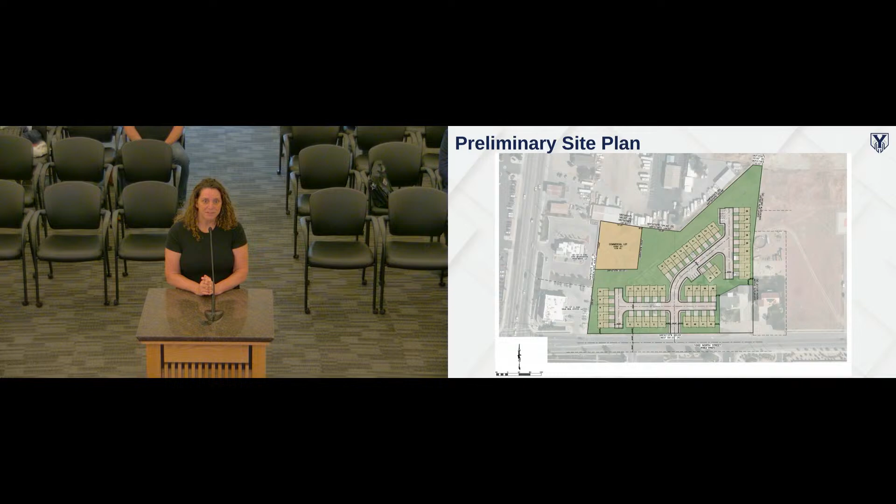Okay, so obviously you're familiar with the location, we don't really need to dive into that so much. If you want to jump to the next part - this site plan is not set in stone. We have not gone through all the nitty-gritty of everything involved because we're waiting and working on this item first. So what we found is, for example, Mr. Perez said it would be really helpful if we understood what these units actually use.

So we took it upon ourselves and went through two different cities and how they were doing it. The first one is the marketplace in Bluffdale. These are all different cities that have this type of product, but the marketplace is very similar to what we are going to be building. If you want to go to the next stage.

Each unit is individually metered inside, and because you have one address on one side, the commercial address is on one side, and the residential address is on the other side. There's two different streets, so if there's a Utah Street and Nevada Street, the residential would be named the same unit number but Nevada, and the commercial street would be named the same number but Utah Street, as an example.

So they're individually metered, and what we were able to do is go into the Bluffdale City water usage data and took all of it. The city has all of that data, and I believe we collected it as well. We showed all the different data and compiled it inside, and none of these units are vacant for commercial or residential use.

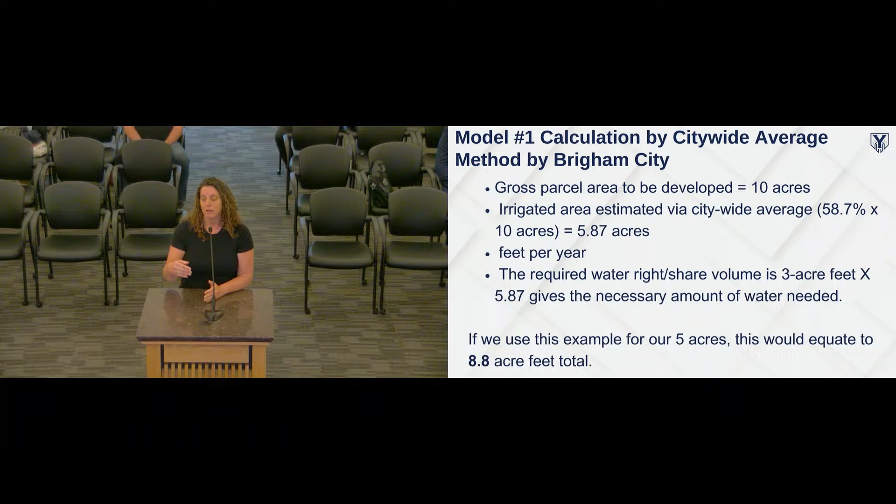They don't go off of the uses or your landscape plan necessarily. Now their code guides the landscape plan, saying, hey, we want drought tolerant plants or things like that inside their code, and we're happy to comply with those things.

So for this particular case, if we use Brigham City's calculation, our piece of land at 5 acres would equate to 8.8 acre feet total that we would need to purchase of water rights. You want to go to the next one for me?

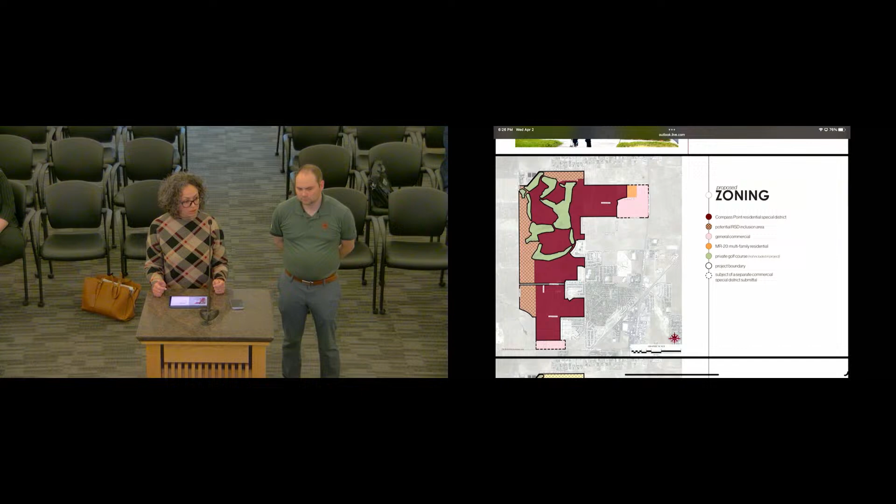It is our intent to stay around 2 to 2.5 units per acre as it relates to the entire community. The land use category there is medium density, and I believe the 2 to 2.5 units comply within that range.

As it relates to the concept plan, while we have overall areas, there's already existing development and natural barriers that provide a better outline of what you can envision for the community to come, as far as development areas and pods, which we will probably move forward terming as villages as we continue with preliminary plat and further design.

The other thing we're trying to take into consideration is appropriate transition of uses. Knowing the overall average is 2.5, we're going to keep a majority of the density closer to the commercial area or closer to the larger arterial roads present within the community.

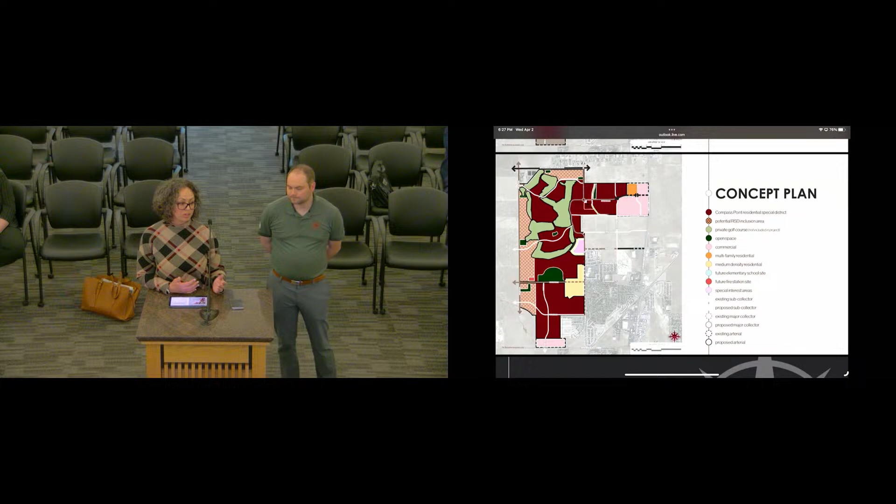As mentioned before, we want this to be a community someone can move into at the very beginning of their stages of home ownership, all the way out as they continue to transition through life. So we've got some smaller home products, including front and rear-loaded townhomes.

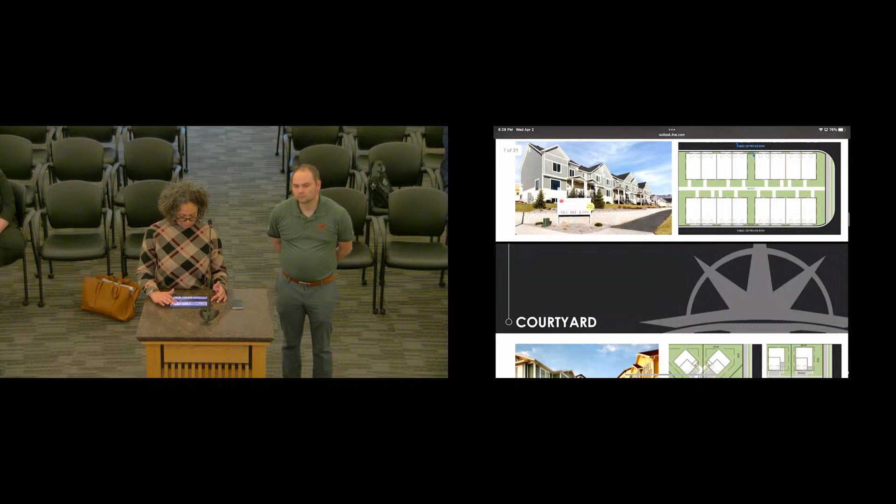We also have a cluster home product, smaller garden front loads, garden rear load, and traditional homes, which we currently have available in our existing communities. We're developing our cottage type, which is a slightly larger home, and then our collection and estate, which are our largest. The estate, for example, are the homes we are currently building within our temple lots, surrounding the temple at this moment.

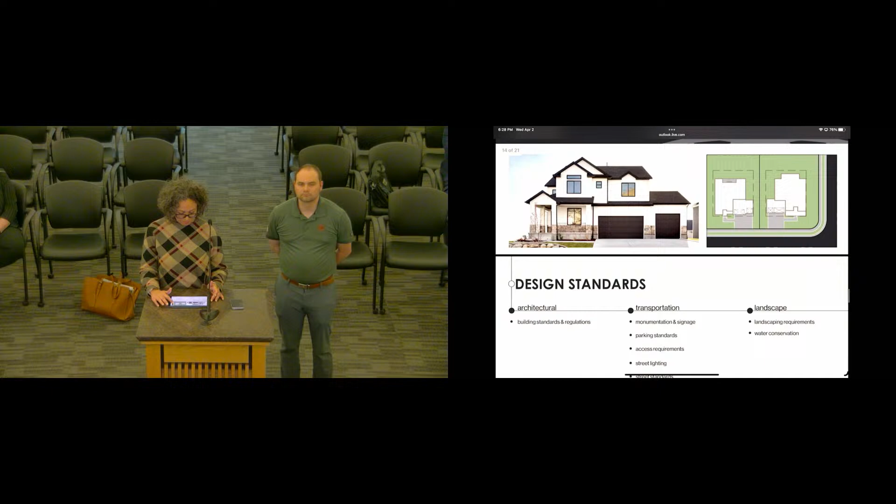Our RSD includes design standards that will allow for flexibility across all of these product types, including standards and regulations. It also covers monumentation and signage, parking, access, street lighting, and street standards we've been working on with the Special Service District. It is our intent to annex this development into the North Tooele Special Service District, along with landscaping requirements and making sure we're meeting all water conservation requirements moving forward.

The open space included within the community is 50 acres total, with a minimum of 47 acres of parks and detention, and a minimum of 3 acres of preserved open space, as shown in green on our open space plan.

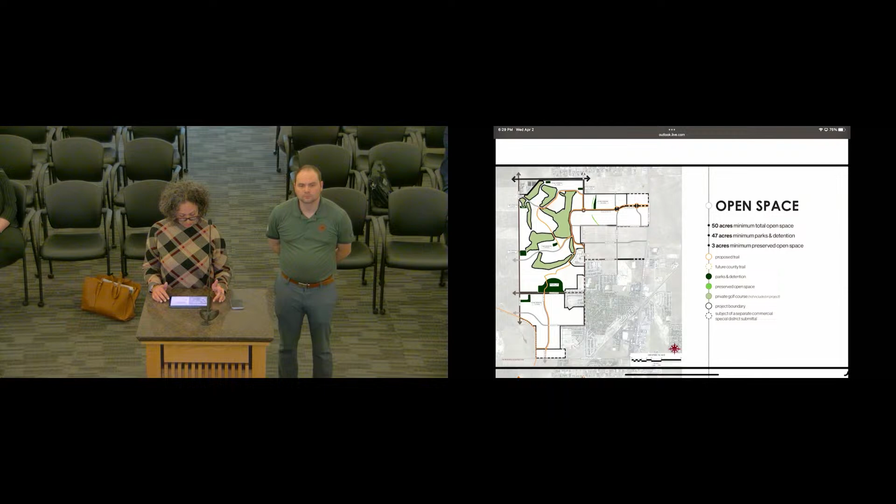As it relates to master planning, we understand we'll have to go through traffic impact studies and work with our water modeling on the finer location of all these items. But we think we've done a pretty good job looking at the master infrastructure required for the number of units we're proposing across the community. At the locations shown within our RSD, we're indicating where we anticipate roads, water, sewer, and stormwater, and the sizes anticipated. We understand all of this will be subject to further modeling and city standards as we move forward on an engineering basis.

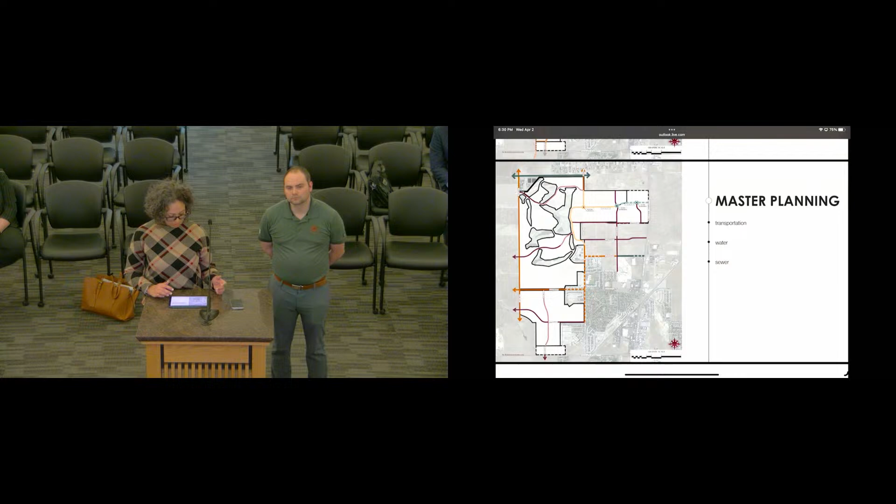And then I will leave it there and open it up to any questions that you might have.

Any questions or comments? I just wondered if you could go back, I was interested in your cluster design, it flipped through so quickly I didn't get to see that. This is provided in more detail in our full application in front of the city. This just gives you a brief overview on the general lot layout, as well as what the typical elevation would look like. Okay, so shared driveways, is that what I'm seeing? Yes.

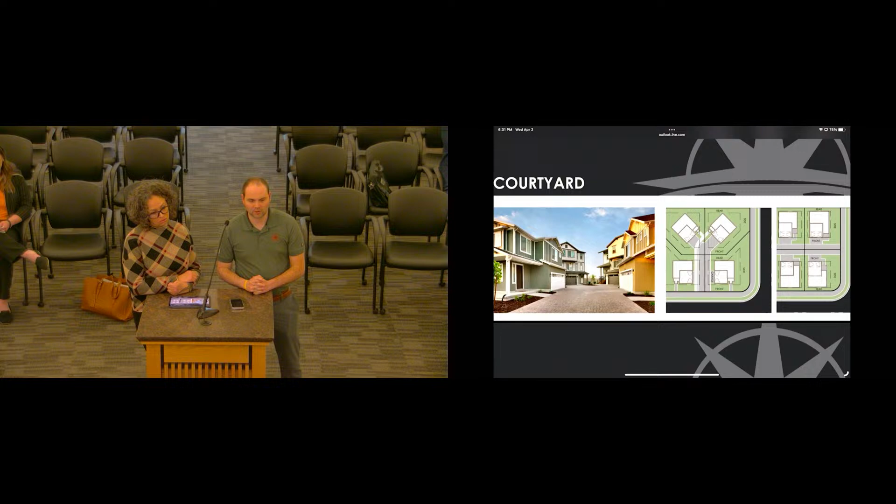Thank you. One thing that's great about this product type is the ability to have a smaller, more affordable single-family home with a yard that they can actually have fenced in. A lot of the economic products can be rear-loaded, hard to have a yard. Here, you can have an affordable home where they can have a dog, their own fenced-in area. The ability to have the shared driveway really impacts the economics to shift affordability to the homeowner in a smaller product type.

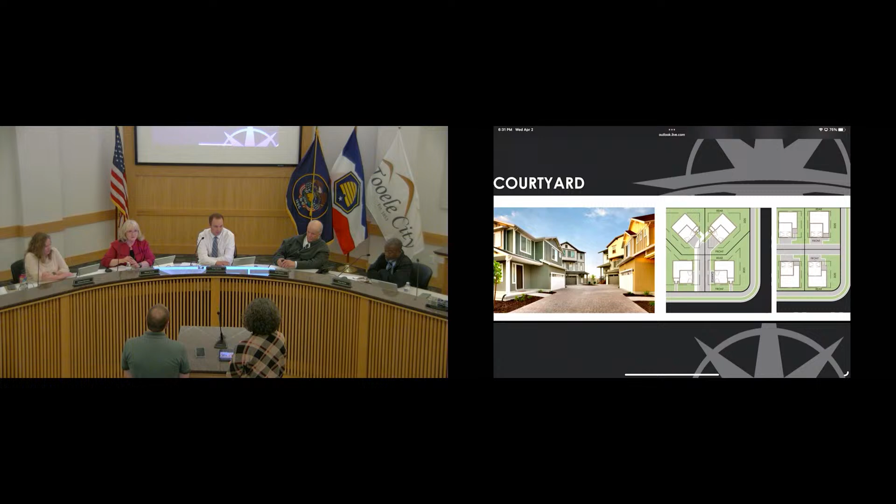So that's the intent behind the courtyard product, and we've seen that function in many different areas. Thank you. I can't find it now, but somewhere it mentioned so many acres of open space. Some of that's a park, correct? But with other developments, we've seen where open space is not always usable open space. Are you trying to make open space usable? If you go down 2000 North right now, you'll see grass along where the fences are. It's not really usable, it looks nice, it's ornamental, but it's not usable. So is it usable open space?

Yes, the intent is, especially on the large area, that we're going to work with the city in dedicating that over so that it's a large regional park, and then it's usable for the activities that are needed for the community. Okay, thank you. And then the trail system, I love the trail system and where it would go.

Would that be done in phases? As you develop an area, you would do a certain part of the trail, correct? Yes, the trails are located along the roadways and included as part of our cross sections of our roads. As we continue to build the community, that trail will continue to be built to connect it once all the community is completed. Are they freestanding trails, or a trail along a road? There will be a trail along the road.

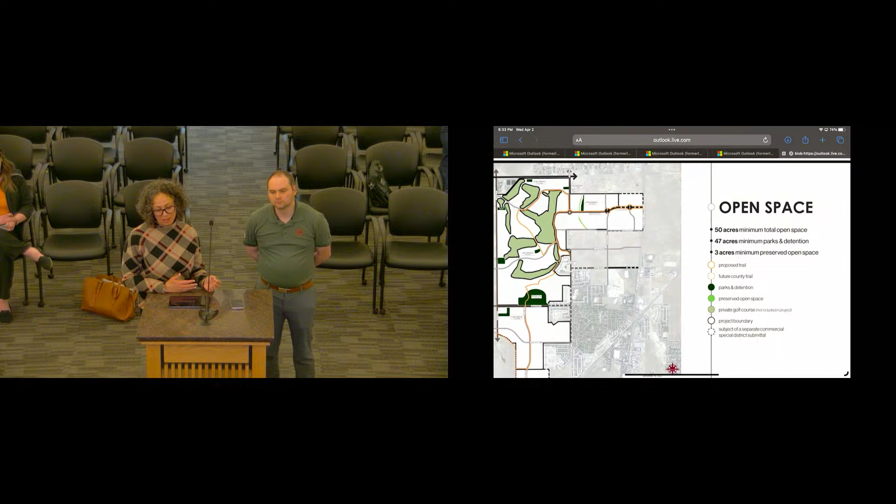All of the trails will be that way? The ones currently proposed right now as part of the plan are along the roadway. Again, the community is unique in that the roads included provide some nice circles that encompass everything, so from a trail perspective it makes sense for us to locate it there. That doesn't prohibit us, as we move forward with the villages in the future, from adding additional extensions onto that. But right now, looking at the master overall picture of the community, it makes sense for us to have it located along the roadway, because the circulation through the community right now is ideal.

And when you say along the roadway, is there a right-of-way, and the trail's just next to the curb, not on top of it? No, it's adjacent to it, and we've got some landscaping in between. So it's separated? Yes. That's good, okay, all right.

Any other questions or comments? It's a lot. There's a lot, yeah. It's a lot. It is a lot. But this is talking about like a 20-plus year build-out, right?

It is. This isn't like it's coming tomorrow. Oh, no, no way. Yeah, this has gotta be able to sell as a multiple decade community that will be developed over time. It's just a lot, I'll be dead by the time they build it. I hope you're not dead in 20 years, Ed. I think I'll be dang close.

One of the really great parts, and Andrew did a great job of explaining this, is that the 3,600 units are already, like, we can go build the 3,600 units.

But doing this district allows us to really make diverse product types and make a more creative community than just putting the same house everywhere, 3,600 of those—it's going to be terrible, right? Agreed. So we're really trying to make a community that's actually really cool, one that people will want to live in and understand.

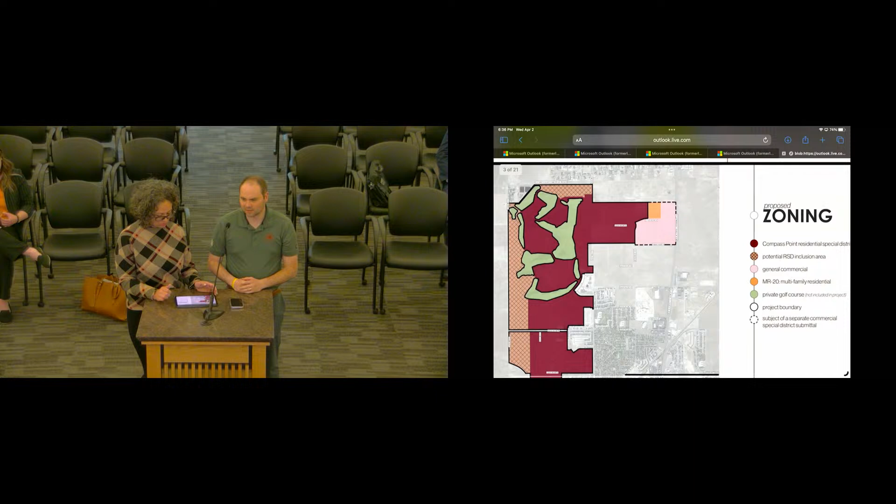And that intent is very real—that's the point of the residential special district, I think. Oh, and I definitely like that. It's a lot of houses, so I'm trying to wrap my head around it, but I like the idea of having different size homes in the same part of town, where you can be with your friends and in the same church ward, or whatever it happens to be.

You had mentioned a lot of the higher density would be near collector roads, and as you see it built out, you'll get to see the whole picture, right? That's what's hard for a lot of people to do, but yeah, I don't have any other questions.

When are they going to start on the 3,100 area? Because if I'm not mistaken, there's going to be apartments and stuff there, adjacent to the commercial. If I'm not mistaken, I saw that too.

On 3,100, we are anticipating submitting the site plan application for that multifamily use, the apartment complex, next week. We're also anticipating moving forward with some of what we're terming as villages, development within the RSD boundaries, as soon as June or July. We've been actively planning—we've gone into quite a bit of detail on the infrastructure, and we're hoping to move forward with villages over by the existing area as well as up on 3,100.

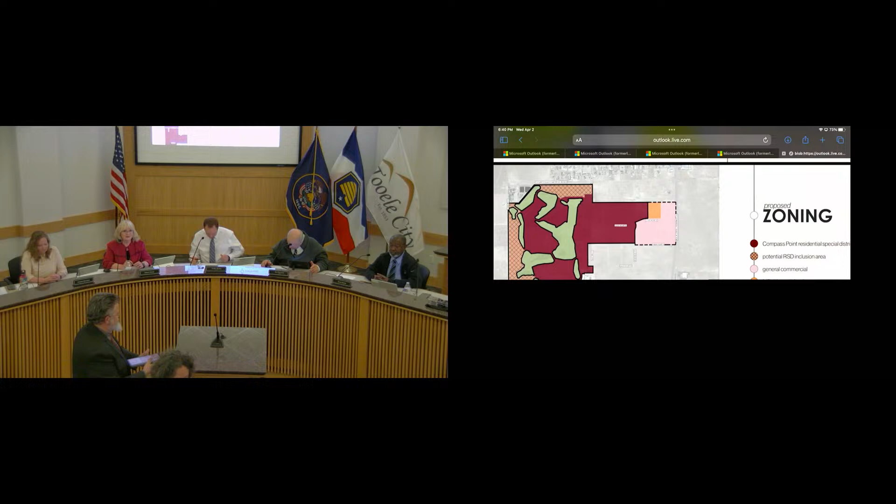Our next discussion item is a discussion on a zoning map amendment request by D.R. Horton to amend the conditions of the PUD planned unit development zoning overlay for Western Acres PUD for 86 acres, affecting 4.5 acres located at approximately 2000 North Copper Canyon Drive in the MR16 PUD zoning district, presented by Andrew Aagard, the Community Development Director.

Thank you, council. There we go. I'm blind without my slides, so. This is more of a housekeeping item, and it involves the Western Acres PUD. I believe all of you were on the council when we approved the Western Acres PUD about 4.5, 5 years ago. Not me. This was before me.

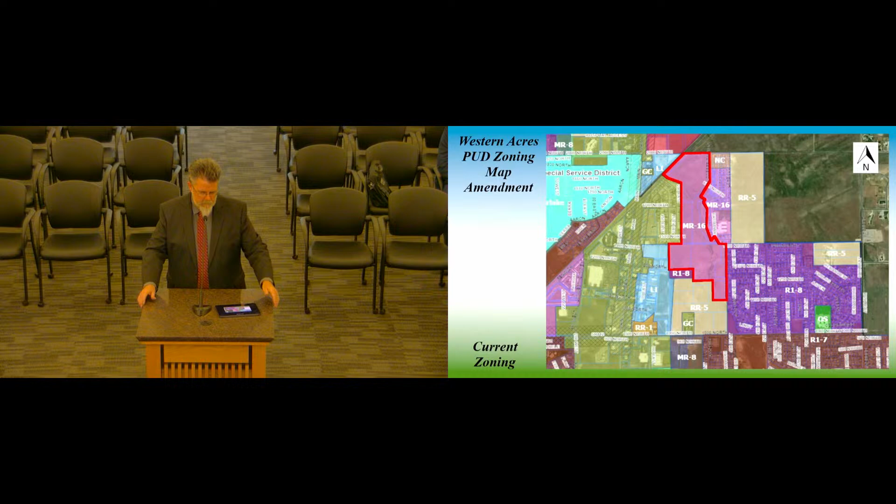This zoning map amendment is a request to amend the standards of the PUD. If you recall, when this was approved, D.R. Horton requested the PUD in exchange for improving Middle Canyon drainage as it extends through the project. At great expense, they relocated and improved that drainage, and put a trail in there, which is becoming a great community amenity, and eventually will tie into the trail at England Acres and create a really good trail system throughout the city.

What we've encountered is when this PUD plan was approved and reviewed by the council, staff had not had a chance to really do a technical review of the proposal. At the time, we anticipated that we would encounter some design issues that needed to be addressed, and this is one of those times. It's a fairly minor issue.

It does not change or alter the configuration of the subdivision, does not change the number of units, does not change the number of unit types. But there is an issue that we need to address now, otherwise we're going to have a problem in the future with this, and it involves the Middle Canyon drainage.

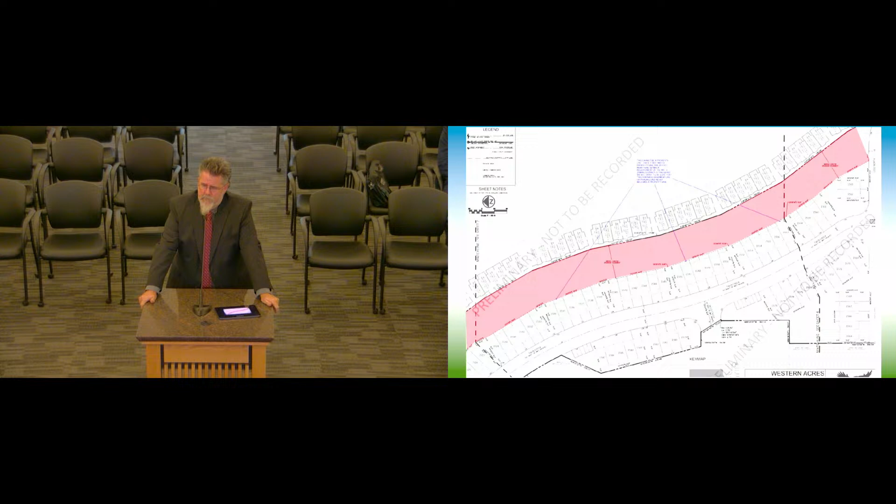The Middle Canyon drainage is about 70 feet wide and extends from the southeast corner to the northwest corner of the development. As you can see on this map, those townhomes on each side of it are approximately 8 feet from the edge of that drainage. Now, right now, that is an easement line. It is not a property line.

So if they submit their subdivision plan and site plan applications, we would approve that because the buildings are not set back from a property line. We measure our setbacks from foundations to property line, not to easement lines.

Now, it is my understanding that D.R. Horton would like to eventually deed or dedicate this drainage to Tooele City for perpetual ownership and maintenance. In order to do that, they have to create this as a parcel, and that easement line then turns into a property line. Then we get into setback issues with those townhomes. We create a bunch of townhomes with non-conforming rear yard setbacks.

Currently, the MR16 ordinance requires 20 feet for a rear yard setback for townhomes adjacent to property lines. What we need to change is we need to change the PUD standards to 8 feet for rear yard setbacks, and in 1 or 2 cases, 1 foot for a side yard setback, pertaining to this drainage easement.

Currently, these are the PUD standards that we currently have for this development. There is a section for R1-8, and there's a section for the MR16. The proposal would only affect the MR16. The proposal is that for rear yard setback for townhomes, it'd be 8 feet from property line, but 10 to 20 feet from property line adjoining public or private streets. We put that in there to make sure that we don't create conflict with other ordinances that require a larger setback when adjacent to a public street, which their development is fully in compliance with.

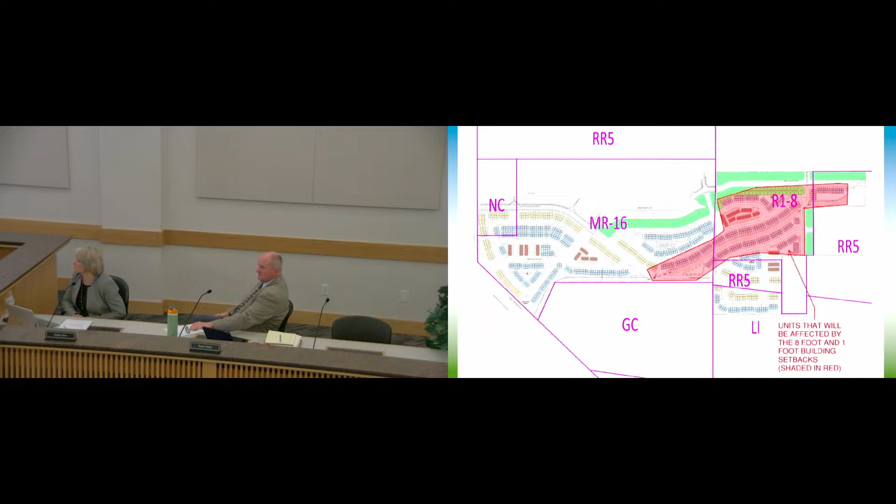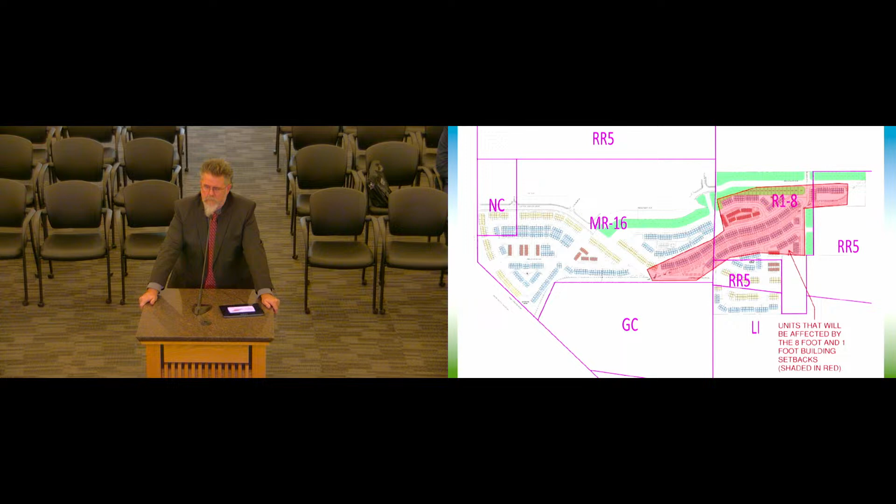Ed, if I could also address that further, they've already submitted their preliminary plan applications for the rest of the MR16, and what you're seeing is what they are proposing, so with the applications we have, we should really be fine.

That answered my question, going back to the map. Okay, thanks, Andrew. Okay, thank you.

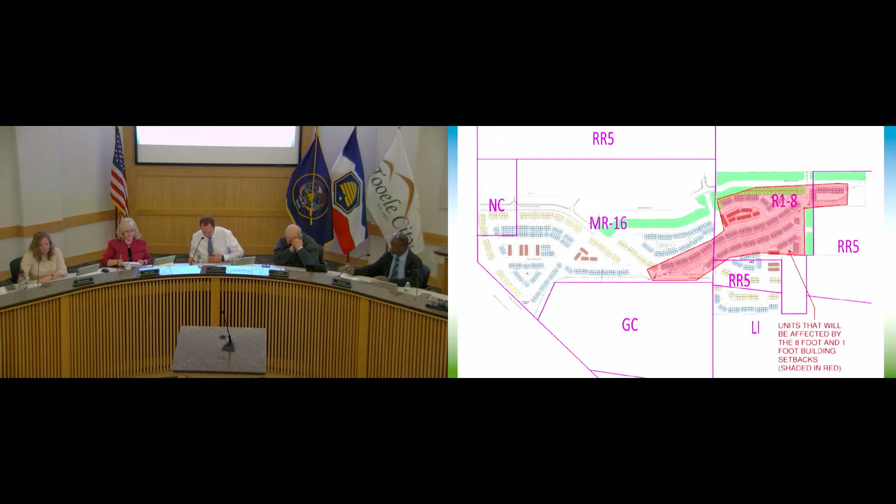Our last discussion item is a discussion on updated water and sewer fees effective May 1st, 2025. This is presented by Jamie Grandpree, the Public Works Director.

Good evening, council. Last year about this time we did ordinance 2024-11 and 2024-10 that set water rates and sewer rates for a 5-year time period. I'm just coming to you tonight to let you know we are now moving to year 2 in both of those. They were already set and approved in the ordinance last year, but I wanted to let you know that we do have those rates changing effective May 1st, which would be on the bills June 1st.

The culinary water rate is going to go up another 7.25% on the base and another 2% on the usage increase. It's set at $10.73 right now for a 3/4 inch meter, which will go to $11.50. The usage rate goes up about a cent to 2 cents depending on where you're at on the schedule. Tier 1 is going from 77 cents to 78 cents, tier 2 is $1.02 to $1.04. So it's pretty minimal on the tier usage.